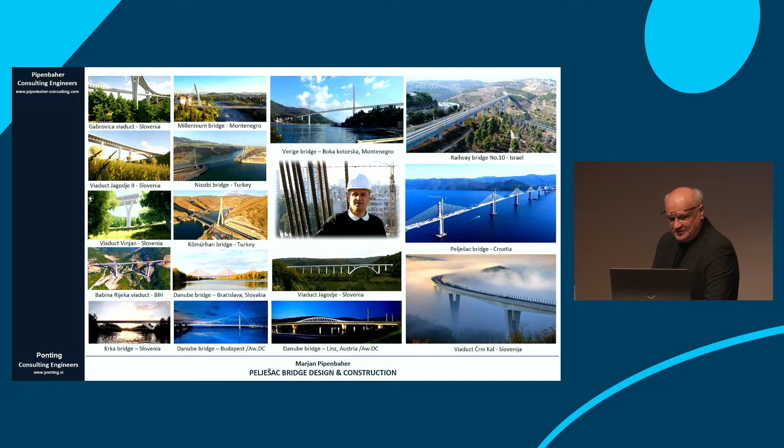Okay, we will complete this session with the engineering issues. For designing such a bridge, you must have not some, but quite a lot of experience in stay cable bridge design, long span bridge design, earthquake engineering, fluid dynamic analysis, and such a bridge.

We should be aware of what our knowledge is, and that we have to construct more and more bridges, not walls. It is also important that we understand that we construct as simple as possible, as all in life, but not as simple as some politicians or other people think. This is also a very powerful statement from Einstein, a genius: It's not that I'm so smart, it's just that I stay with the problem longer. It's very good.

About less is more, più di meno, mit wenig mehr, it is also very important. Exupéry wrote very nice statements about this issue: what is perfection? He was a constructor of airplanes, and also a writer. And you can see the development of the airplanes from the First War to the Second War, the Spitfire and the stealth structure. Perfection is when you cannot remove anything more.

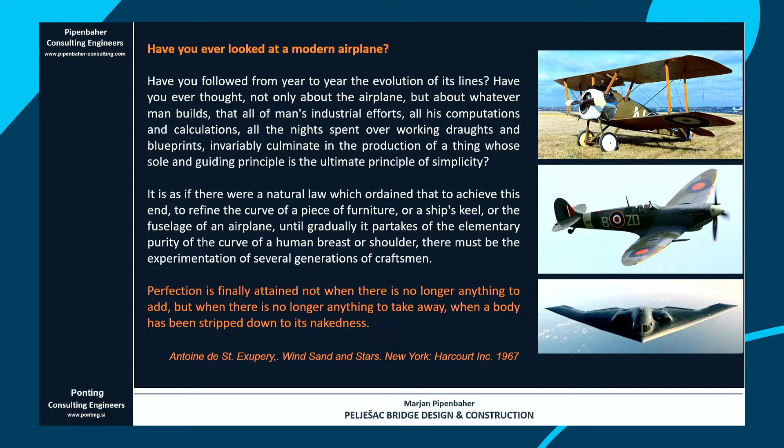Engineering is an old issue, and it was always connected. It was always the master builder. From Roman times, Vitruvius wrote his book, De Architectura. He discussed functionality, aesthetics, and firmness, which means the stability of the structures. Then Palladio added that the bridge should be ornamented, well-aligned, comfortable, durable, and also that we should take care of the architectural design of the bridge.

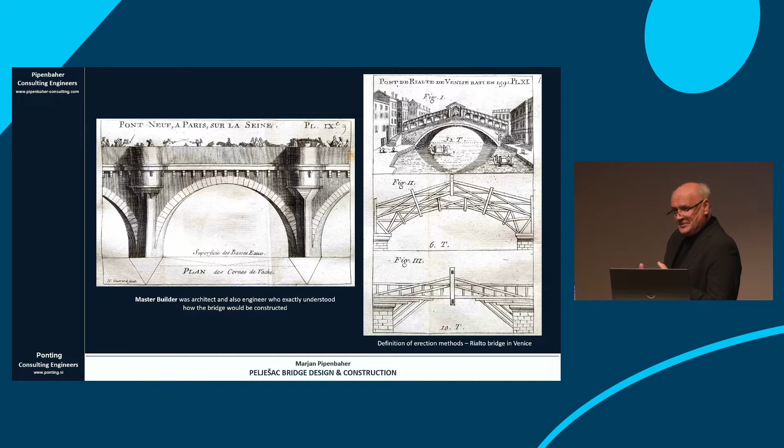Till the end of the 18th century, there was the master builder. The builder was the architect, the engineer, the constructor, and what was very important, the master builder should know exactly how the bridge or the structure will be constructed. Anyway, bridges contribute a lot to our society, bringing growth, integrating people.

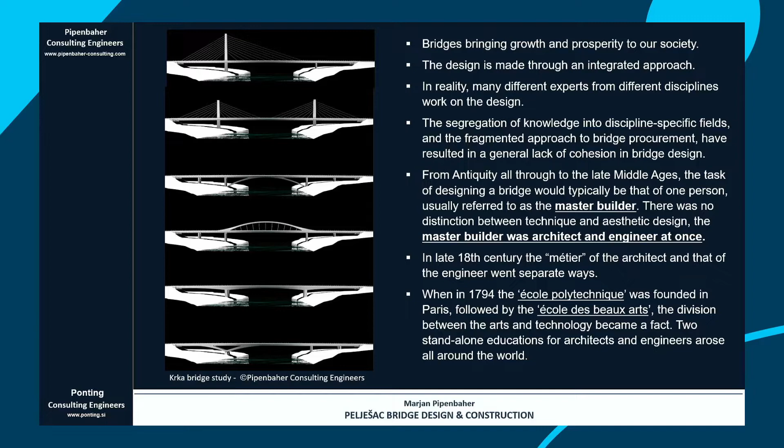But there is one problem, the segregation done at the end of the century, where the building process was separated by the École Polytechnique and the École des Beaux-Arts into architecture and engineering, and that leads to specialization. I just want to show you on three or four of my projects how I understand the architectural design of the bridge. For me, it's very important. I like to study a lot. I like forms. I like nice design.

So for large bridges, that means large viaducts, we should take care that the structure is already the architecture, so that the architecture is developed through the structural design. It is normal that you can realize, that you can understand, the flow of the forces. This is the Črni Kal viaduct in Slovenia. We won the competition, then constructed it. We have just one 95-meter tall pier, and it looks very nice in this landscape.

Then I got a mission: under the Črni Kal, there will be two high-speed railway viaducts. We already had huge problems designing the Črni Kal, and after that we have to add two additional viaducts.

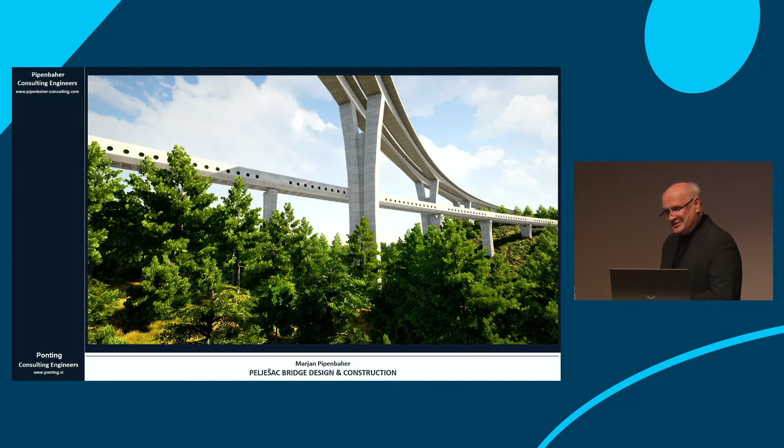And that was quite challenging, and my idea was that these railway viaducts should be designed like a high-speed train which is passing the valley, and it will look like this.

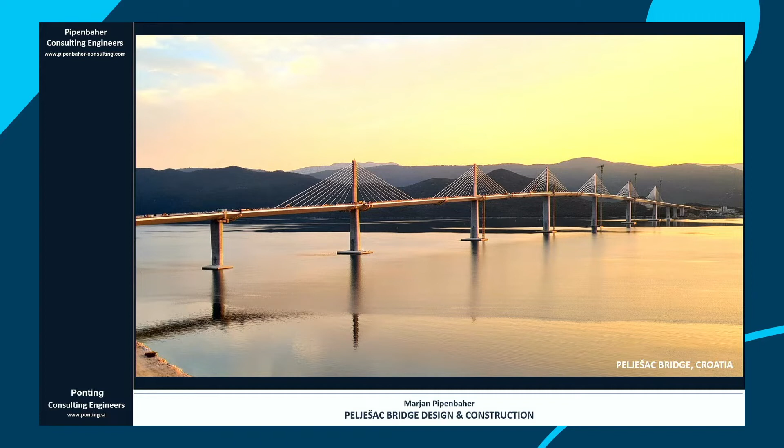Then is Pelješac Bridge, which is, from a structural point of view and construction point of view, a really demanding construction: foundation, earthquake, wind, all these issues. And it is also very important how to fit it to the landscape. The structure of Pelješac should not dominate this very, very nice landscape, and we can just add a structure which linearly passes this beautiful bay.

Okay, that was the Millennium Bridge in Montenegro. When Montenegro declared independence, they wanted to have the bridge as a statue of modern Montenegro. Okay, we did it. It is a bridge, it is a statue, and they like it.

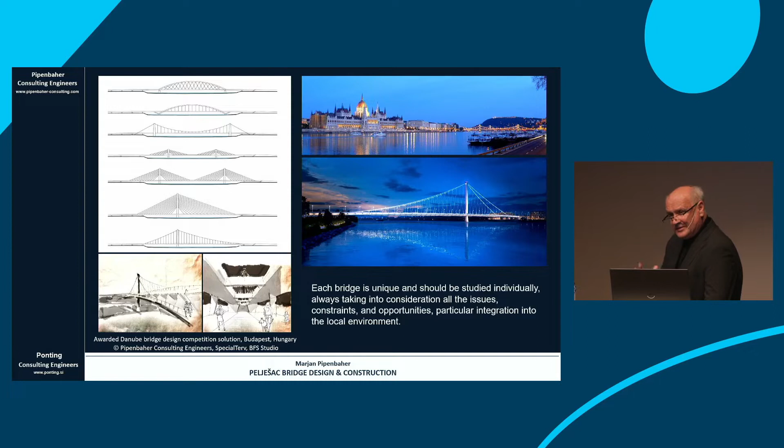This is Budapest Bridge. We were invited to the international design competition. 18 of the best or well-known offices from all around the world were invited, and we also got the purchase award in this competition. Another competition which was also awarded was the competition for the Danube Bridge in Linz. We were awarded the second prize.

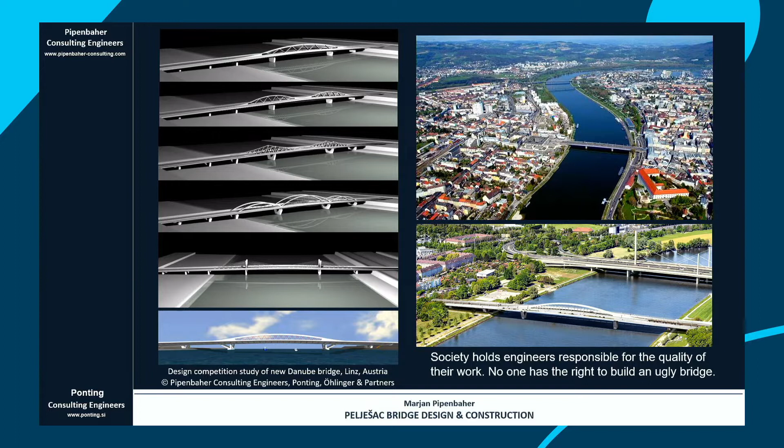This bridge, as I told, for me was like a Ferrari. Marc Mimram won this competition with more of a Chinese design bridge. A bridge designer must consider visual quality as a fundamental criterion, like stability and also safety. This is the bridge concept. This is the bidding design.

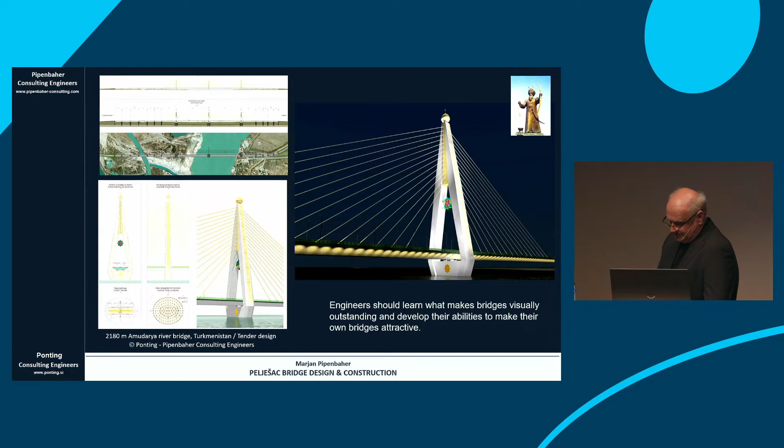I prepared one conceptual design or bidding design for the Amudarya Bridge in Turkmenistan. The presentation was done, we presented it to the president, but after that, this French-Croatian joint venture was not strong enough to push out the Ukrainian contractor.

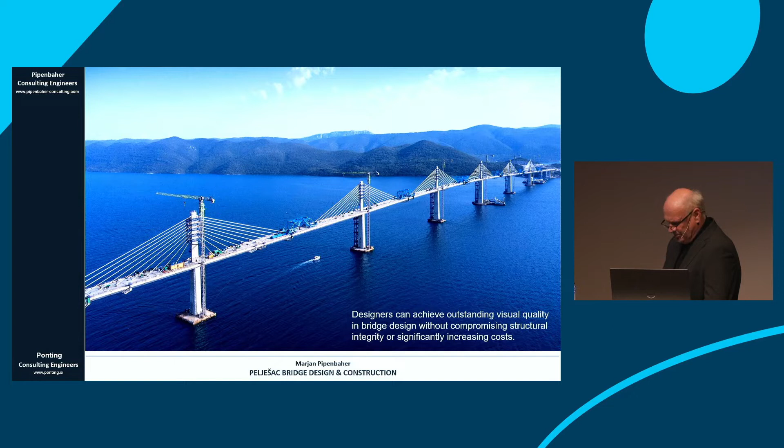And of course, the Pelješac bridge, I like it very much. I like this landscape. I like Croatia. And I have to point out, designers can achieve really outstanding visual quality in bridge design without compromising structural integrity or construction cost. That's very, very important. You don't need to add so much. The design for bridges doesn't cost so much, just a little bit, and it is worth making these efforts.

For bridges and for other structures, I always discuss that for me the bridge builder is an engineer and architect. I cooperate with a lot of architects, we also find a way, but a lot of bridges were designed only by me, like Amudarya, like Koroshki Most, like all the bridges in Turkey, cable-stayed bridges over the Euphrates River, also the Pelješac bridge. And what can we learn from history? It is important that the bridge builder, that means the designer, should have enough experience. Also, for bridges, it's very important to have technological knowledge, because the designer is the first who should know how the bridge will be constructed.

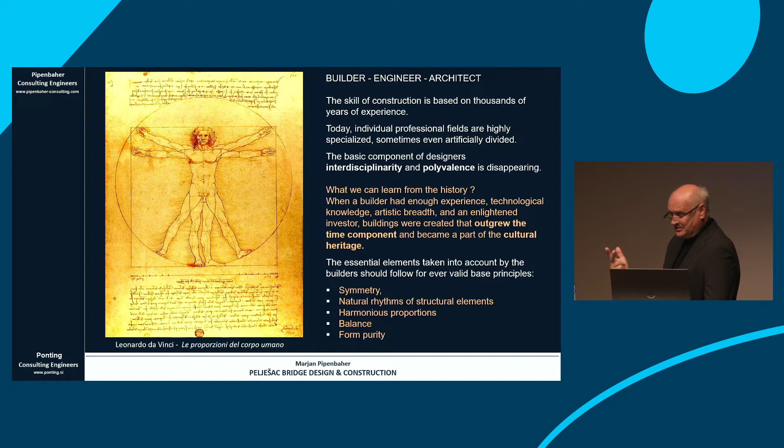It is also important that he has architectural feeling, and on the other side, you should have the client who will support the idea, who also has to pay the investment, and then we can get buildings which can outgrow the time component and become part of the cultural heritage. But always the main issue is symmetry, natural rhythm, harmonious proportion, like always in music, balance and form purity. And just like true love, architectural and structural design bridges can last a long time, surviving all styles and all fashions.

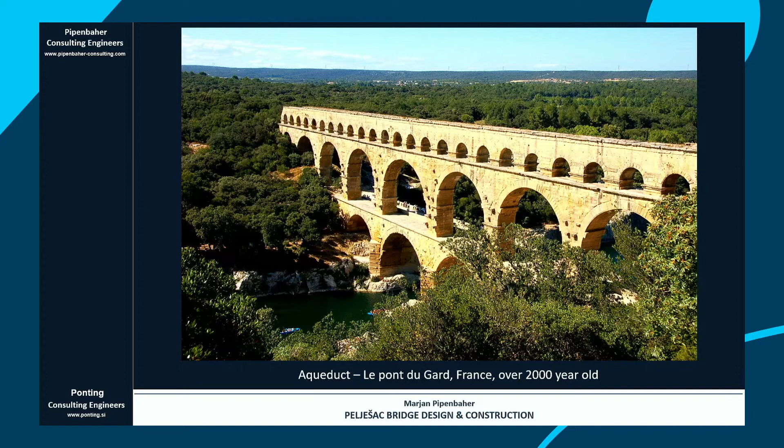And one of such bridges is the Aqueduct Le Pont du Gard, over 2,000 years old. And I have to show you a very interesting concept of a bridge, which was prepared by Faustus Verantius 400 years ago. In the meantime, technology, design, computers, all this contributed a lot to the development of bridges. In the meantime, man also landed on the moon. We have a space station. And in the meantime, such bridges were also constructed.

It's amazing, Turkey now has 2 world records, not the Chinese anymore. 3 years ago, the Chinese had all the world records for long span bridges. And for stay cable bridges, of the top 10, 7 were constructed in China, 1 in Korea, 1 in Europe, and 1 in Japan. And this is the Sultan Selim Bridge, which follows this idea, the 400 years old idea of the hybrid bridge concept.

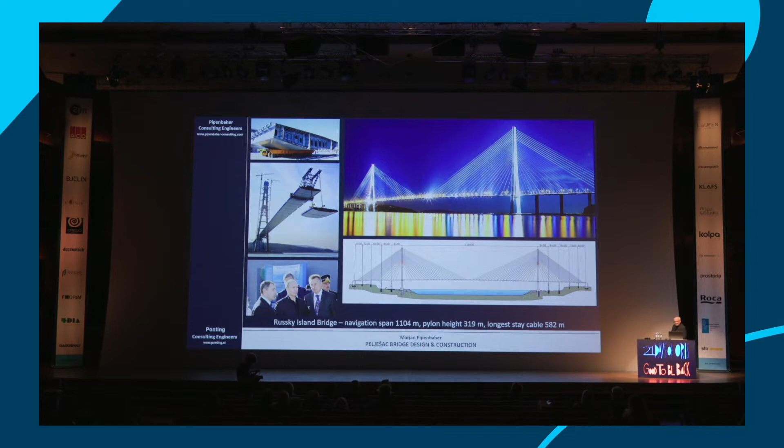And we should not forget, all around the world where I was working, bridges are always a subject of politics, very interesting for all politicians.

I also want to point out one issue, my experience from the last competition for the Danube Bridge in Budapest. Budapest is very nice. I liked it so much. It has a lot of bridges. But it is interesting, all the old bridges are very nice, but the bridges constructed recently, I don't like them, they have too much of an engineering approach, without any feeling for the architecture.

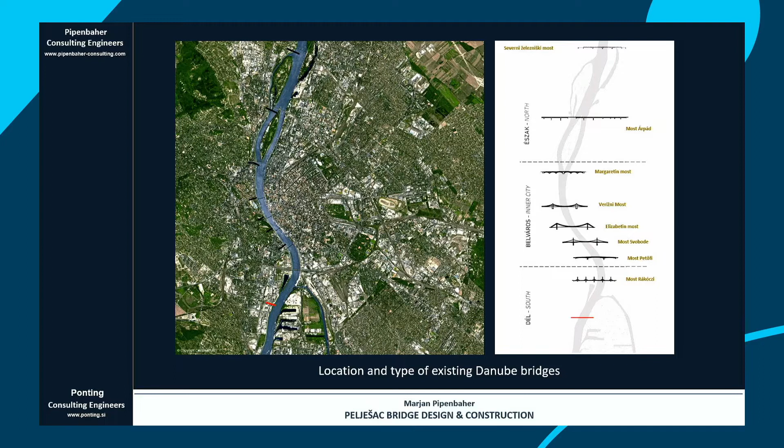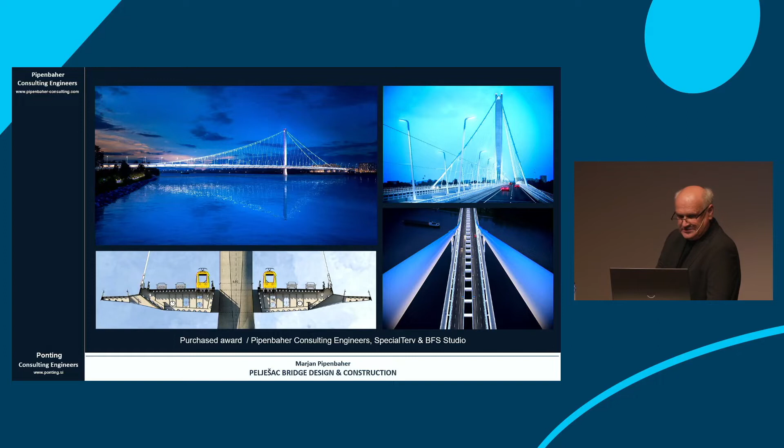Urbanism in architecture, as you heard in all these lessons, urbanism is the main issue in architecture. So you have to really understand the genius loci, the location, to find the proper approach. This is also very important for bridges, that you understand the location of the bridge, topography, geology, and all these issues. The problem is also that quite famous offices, architecture and structural engineering offices, gave such a proposal. That means it's only important that it is not déjà vu, and it is the negation of all structural logic.

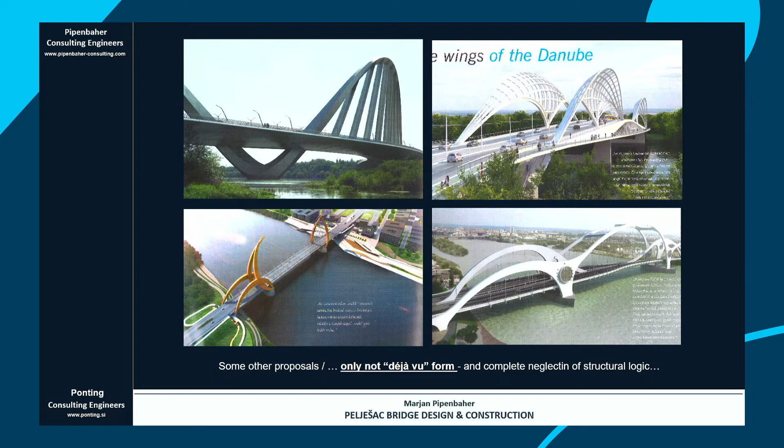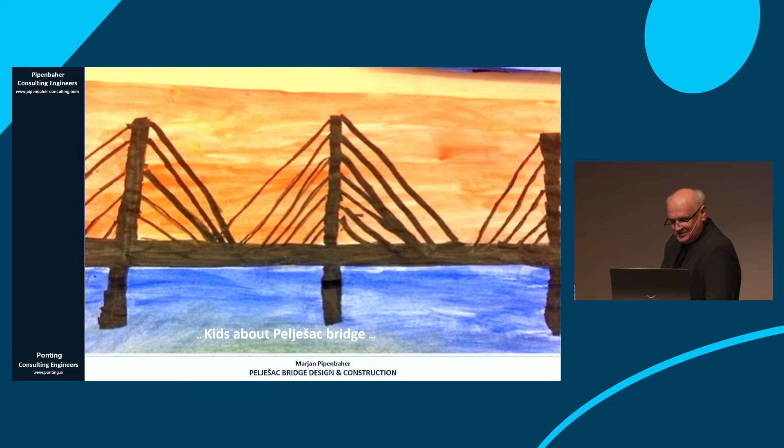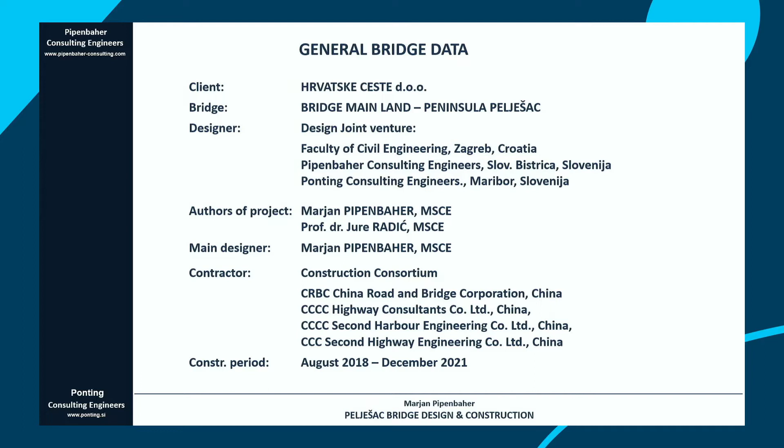I just want to point out that CRBC did really a perfect job. They made a lot of effort. It's not easy to come to Europe and start to construct. I was several times in such a situation, in Turkey the first time, in Israel, in Algeria, in Germany, in Austria, in Croatia also, in Montenegro, in Serbia. It's not easy, you have to come, you have to prove that you're able to do it and so on.

Okay, these are the main characteristics of the bridge. It is really a huge structure, and this is the responsibility. These are really large structures constructed in the area. That's 70,000 cubic meters of concrete, 70,000 tons of steel structure and so on. And it will stay there. We will not be alive anymore, but they will be there. If the maintenance is okay, it will stay there without any problems for 200 years, unless there are problems with the functionality of the bridge, if the technology of traveling totally changes.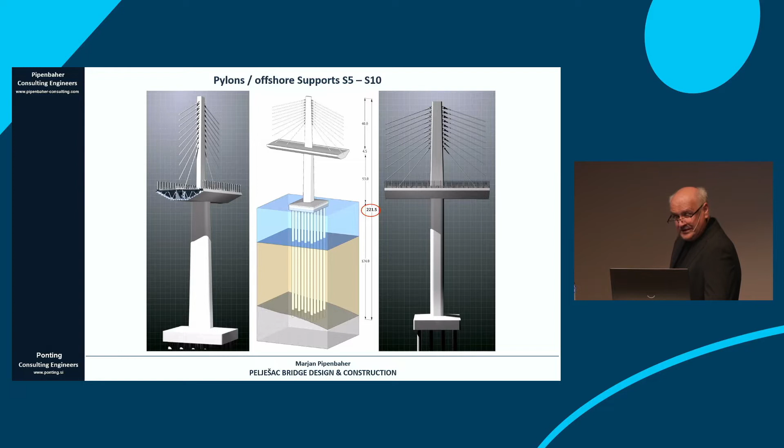These are the piers. What was very problematic, and where we spent a lot of time, is how to found the bridge. We analyzed having skew piles versus just vertical piles. We decided to have just vertical piles, to simplify construction and reduce the risk.

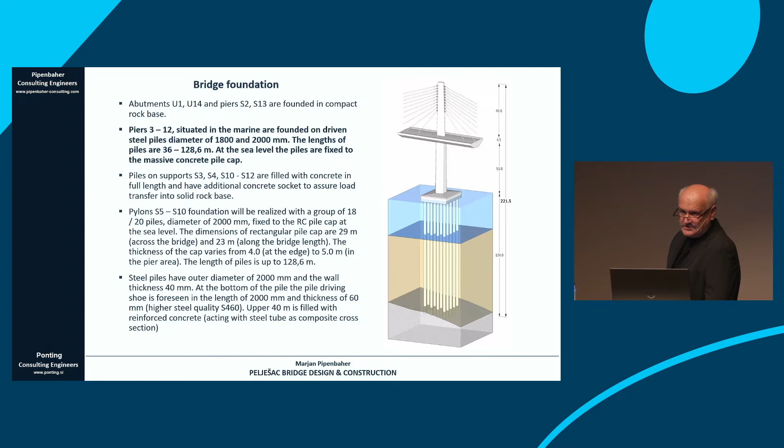It is very important during the design to do the risk study, not just how much the bridge costs, but also the risk study. What are the risks? Something can be cheap, but the risks are very high. It's very important that in parallel with the design, we think about what are the risks during construction, and what are the consequences on delaying construction and the cost if something happens.

Just a short overview about the static and dynamic analysis. For such bridges, we always do two parallel analyses with two teams inside the office. We don't want to have any serious complaints after that, and discussion with the check engineers.

The check engineer for final design was COWI, this famous company constructing and consulting all around the world, with over 6,000 engineers. For detail design, it was Ramboll, even larger than COWI. We didn't have any complaints, so we didn't change a lot, almost nothing. That's very important, because you can lose a lot of time.

I'm now check engineer also for one very large stayed cable bridge in Turkey. They intend to construct the channel between the Black Sea and the Sea of Marmara, and there is a bridge. We were not competitive, we lost this job, but the client, the General Highway Director, wanted me as check engineer for this bridge. I know what it means if the project is not done properly, how much time you lose.

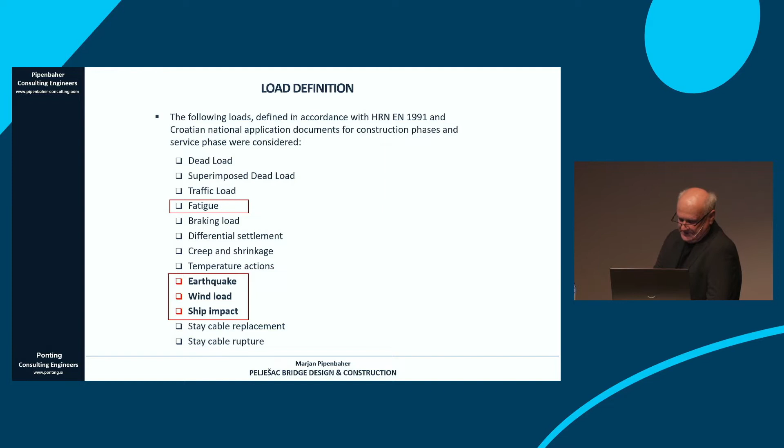The loads which are decisive for the Pelješac bridge are, of course, earthquake, wind load, ship impact, and since we have a steel plate superstructure, this means fatigue is also very important. We did first a preliminary analysis, and after that a detailed analysis.

What was also important is that such a bridge with such foundations, in soft clays, you cannot do linear analysis. So the bridge was designed and analyzed with total non-linearity, considering soil-structure interaction, meaning the interaction of the soil and the bridge together. That forms the curve for analyzing the bearing capacity.

One important issue is the wind load, especially during construction. Bridges are very sensitive during construction because they are not yet connected. After they are constructed, they are quite stable. The stability can be affected due to foundation issues and so on, but generally it's okay.

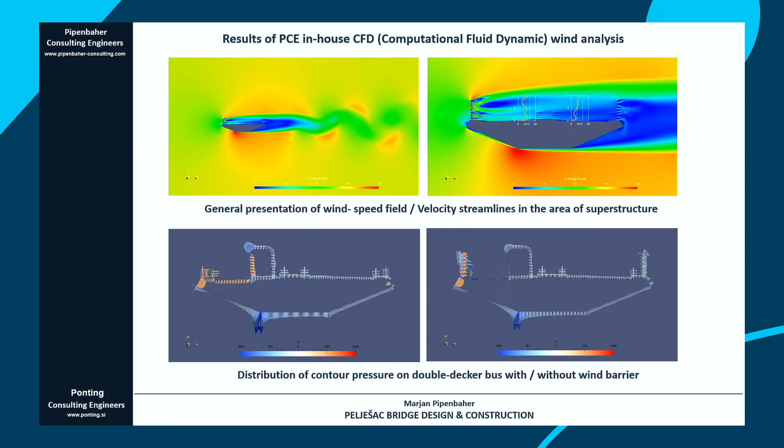It was also important that we check the stability with traffic, to ensure the stability of vehicles. For personal cars, there will be no restriction. For trucks, perhaps some restriction for the very light, high double-decker buses, but up to 130, 140 kilometers per hour, there will be no problem with stability.

As is usual with such bridges with such a span, we did the wind tunnel test, done in Copenhagen, Denmark, by Force Technology. First is the section model test, and if that's all okay, then follows the full bridge model test.

I can show you now. This is the section, this is the pylon test, the bridge during construction. In reality this is about 66 meters per second, that's about 240 kilometers per hour.

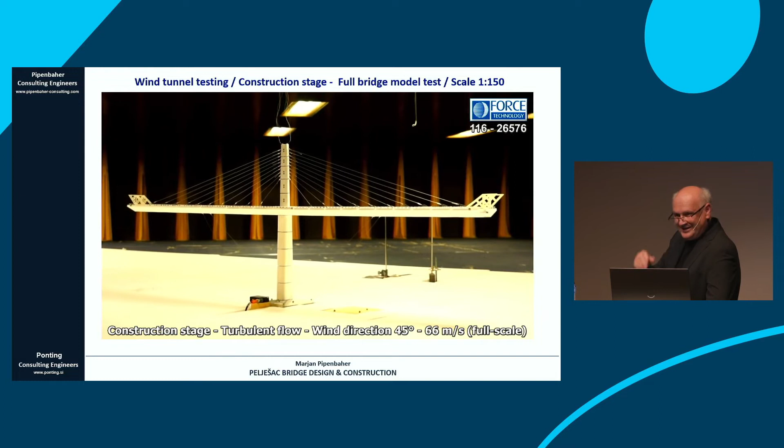So these steel bridges are not as stiff as concrete bridges or stone bridges. They always vibrate, they always vibrate. It's just the issue that the vibration should be within the prescribed limits.

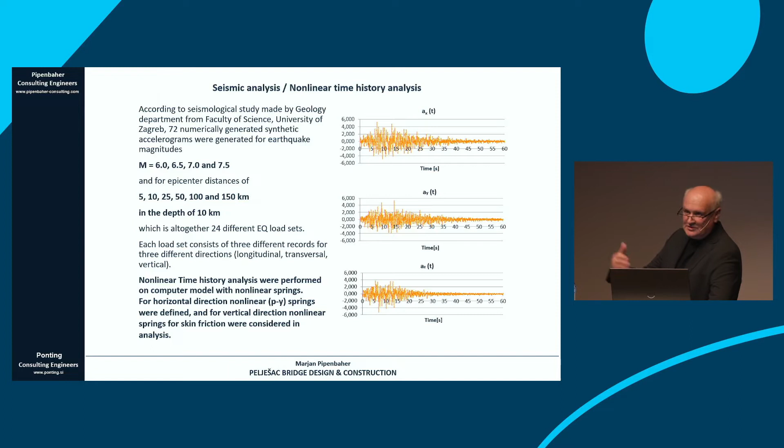What it would be, really the huge problem is the seismicity. We did nonlinear seismic time history analysis. We got from the university in Zagreb, from the Institute for Geology department, the accelerograms for earthquakes with magnitude from 6 to 7.5, with epicenter 5 to 150 kilometers apart, and at a depth of 10 kilometers.

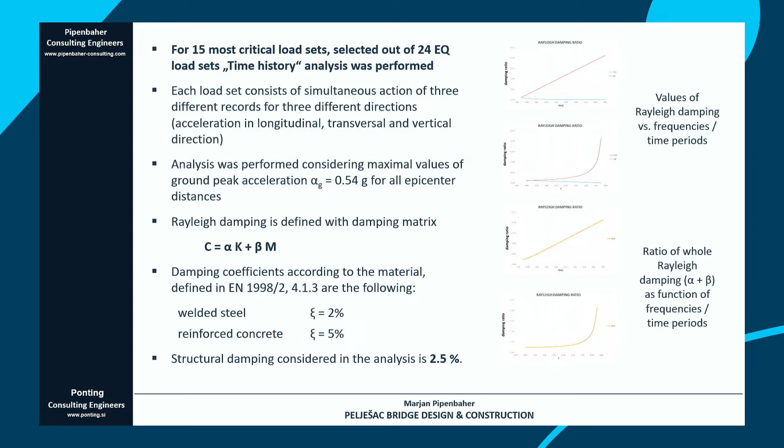Always it's a problem, what is the real damping? This is not so easy. So at the end you have to sacrifice some frequencies, but okay, it can be done. Theoretically it's not clear, but when you come to the practical problem, it becomes a problem. But it can be done, and it was done.

That's okay. Of course, the bridge is designed so that we don't allow any damages. This is very important, all this issue about the reduction factors and so on. They can be applied in buildings, but also in buildings, I have several times designed tall buildings, if you consider and estimate the damage criteria.

What happened? I designed in Ljubljana one with Professor Podreka, one residential - it's a business house, 70 to 80 meters high, and the structure cost was 50 million euros, but the facade was 10 million euros. So we have to be very careful.

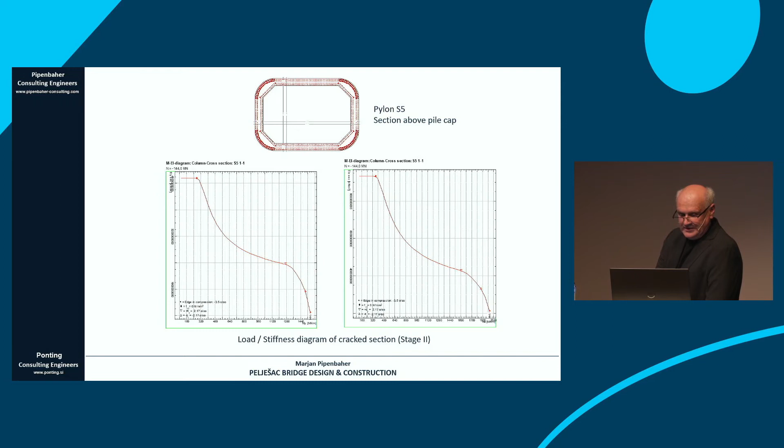We also paid attention to the contact between the concrete structure and the steel structure, because we designed it quite inventively. It is a hybrid structure, so we don't have any bearings under the pylons, and this is quite a delicate contact between the steel structure and the concrete structure. That was all designed and so on.

This is about design. Another issue is service life, monitoring and maintenance of the bridge. This is also a very, very important issue, and the client and designer, all of us should take care about this. The bridges which are 2,000 years old, these bridges we are now constructing cannot last so long. They are also not designed in a way like arch bridges with very, very thin sections, mainly in stone.

So it's very, very important that the client understands that something is construction cost, something is service life of the bridge, what should be done during the service of the bridge, how to maintain it, how to repair it. And also we have to reconsider what will be the reconstruction and replacement cost.

I'm now designing 2 highway bridges in Slovenia. This will be the first time that 2 bridges, 2 viaducts, one 450 meters long and one in Ljubljana 300 meters long - they are so damaged that it is crazy to invest an additional, I don't know, 1,500 euros per square meter. So we have it, and the client made a decision that the bridge will be replaced with new structures, and this is really problematic.

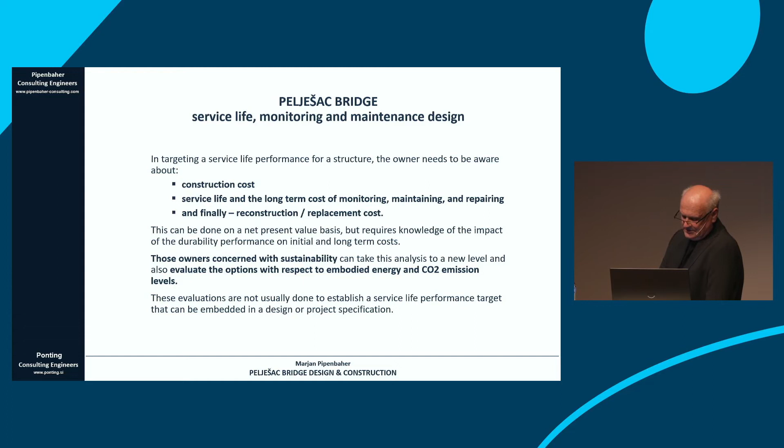What were the special measures for increasing the durability of the Pelješac bridge? The first was we don't have any sharp edges - that's the first. Then we used ultra high strength concrete, C50, 60, pylon 70, 85. We also need this strength because of the forces, because of the loading.

We increased the protection thickness, thickness of the protection layers. Then we additionally reinforced this protection layer with stainless steel bars. Also, we used protective coatings.

It is very important how to cast the mass concrete. The pile cap has dimensions of 29 by 23, and the thickness is 5 meters. The designer and also the contractor should take care how such mass concrete will be constructed, and what are the consequences so that it does not crack. These are very important issues.

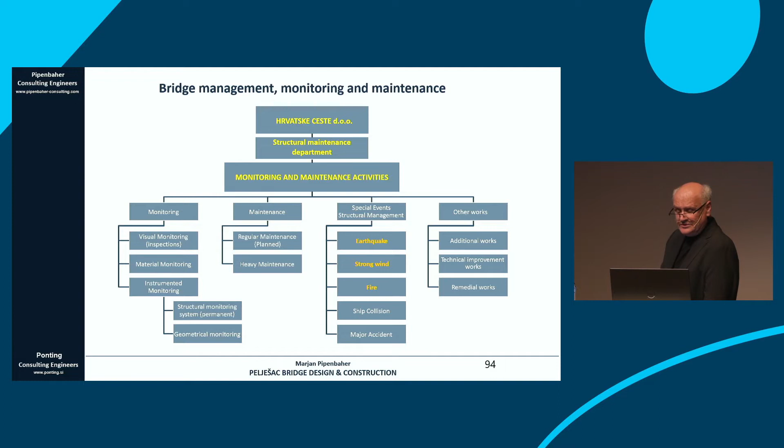These are all issues about the bridge management. We prepared in the final design stage all these reports about the bridge managing, monitoring and maintenance, and now during the detail design there will also be prepared a detailed report about how the bridge should be inspected and how it should be maintained during the service.

There are a lot of recommendations, and what is also important, we also install on the bridge a complete monitoring system, so that we are able to analyze the short and long-term structure behavior, that we can early register the potential damages, that the client can effectively plan the maintenance work, assessment, and of course we are increasing safety. This is the concept.

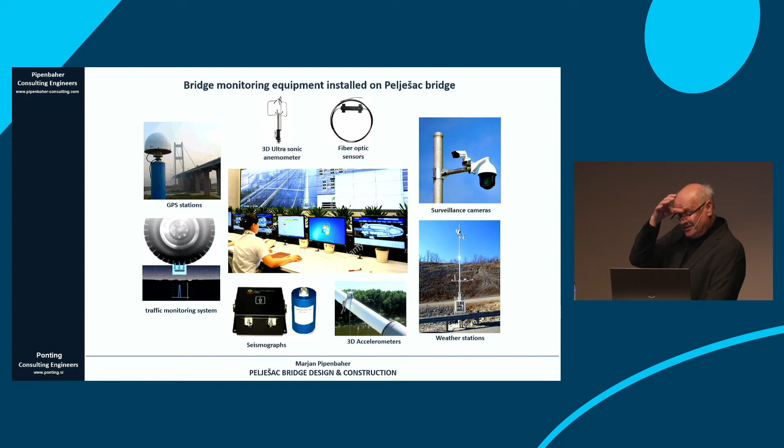Now it's already completed and installed, the complete bridge monitoring system. That means over 200 fiber optic sensors are installed on the corner piles, practically on all supports, then on the piers, on the pylons. Then we have accelerometers on the pile caps and the structure, top of pylons. Top of the pylons are also GPS stations, so that we have through the satellite direct information in time what is the deformation of the pylon.

There are 2 anemometers, one for measuring Bora wind, one for measuring south wind, and also 2 seismographs on each side, because it is very important that during an earthquake with a magnitude over 7, we should know what was the real acceleration, what is the spectrum of this, so that we can really reanalyze the bridge and see, but it should not be damaged in such a case.

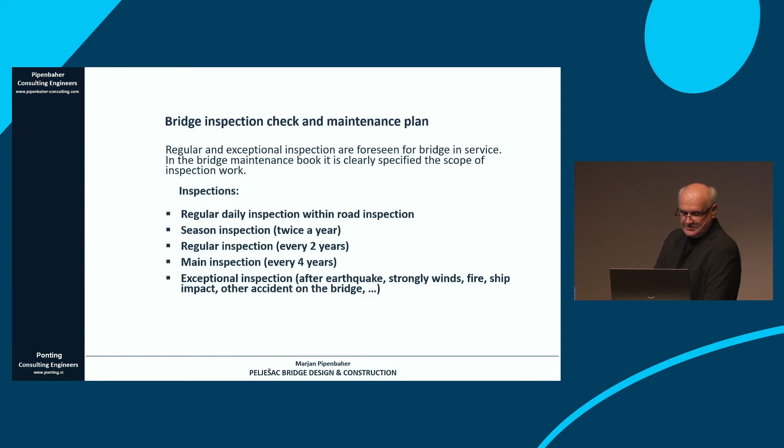Important issue is also the bridge maintenance and checks. That means daily inspection, seasonal inspection, every 4 years, and after exceptional events like earthquake, strong wind, fire, ship impacts, and so on. And we also prepare the table for the client to warn him what he will have to do during the service, and what will be the activity.

For example, when to replace the anti-corrosion protection of the steel structure, when to replace the pavement, when to replace the asphalt, and so on. Just to show a little bit, if the bridge will be well maintained and somebody really will take care of it, the bridge even after 100 years should be like untouchable. But another issue is if you don't take care or you have poor maintenance work.

And now, what will also be very interesting for you, how the bridge was constructed: the site organization, production of piles, pile cap construction, pier construction, pylon construction, superstructure, execution of specific works. Usually, not only for bridges but also for buildings, when you complete the design and send the drawings and digital version, for the designer this is not the end of work. The real work starts during the construction, because you have to take care of the method statement with the construction company.

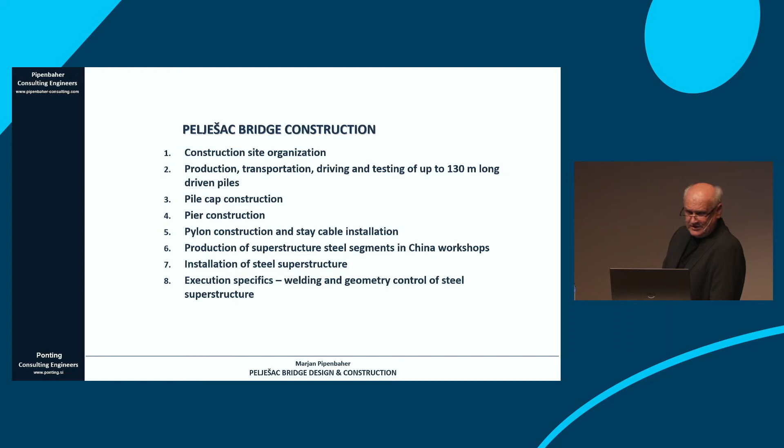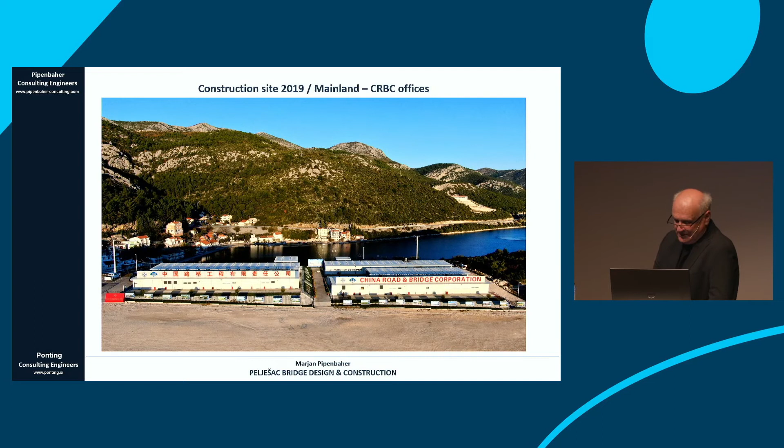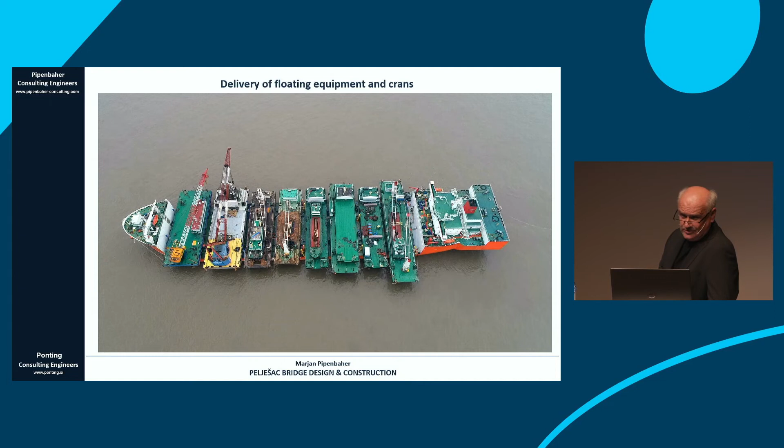The Chinese took care that all this was done. Of course, the main issue is technology, how the bridge will be constructed and what technology is available to the company. They delivered, in one go, eight floating barges, also a floating crane with a capacity of 1,000 tons, which is quite rare in the world. Such floating cranes have Korean, Japanese, and also Chinese contractors. In Europe, it's mainly up to 500 tons.

And this is how it was started, and here is the driving machine for the driving of the piles, and production. We have to see how the pile caps were done. In the final design, we were thinking, okay, if this will be constructed by European companies, we have to do it so that they can be competitive.

So we took into consideration that the piles would be done in two pieces. But the Chinese said, okay, we are able to do piles up to 130 meters in one piece, and that was done. And here they gained at least 2 months, because the welding of the 164 piles

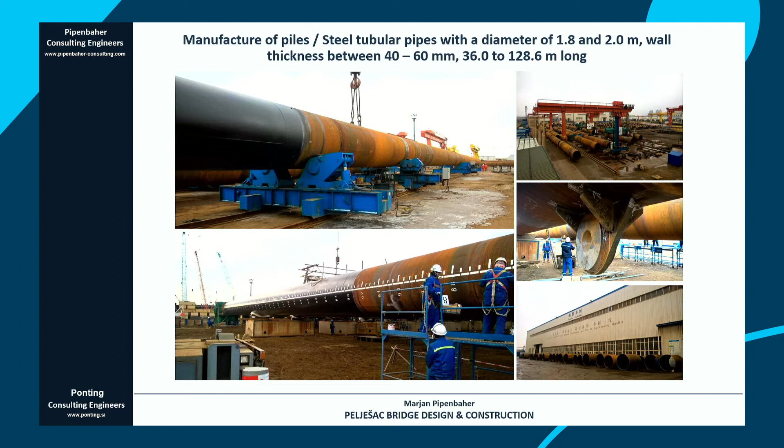with a diameter of 2 meters and a thickness of 40 millimeters would be at least 3 days per pile, without complaining about the cracks, about the bubbles, and about the weld quality. Construction of a pile foundation.

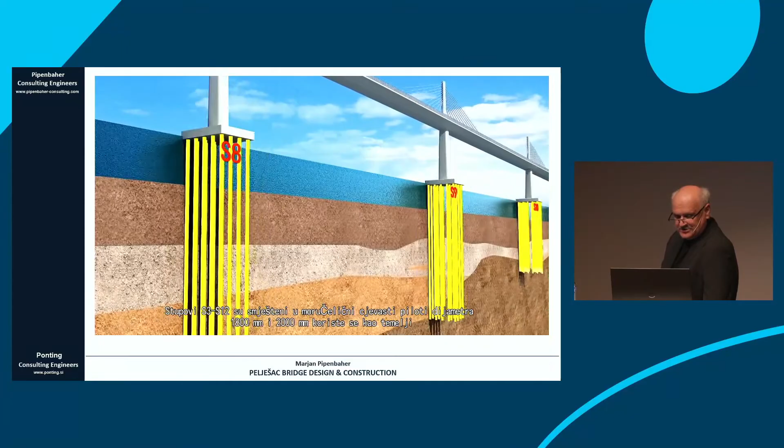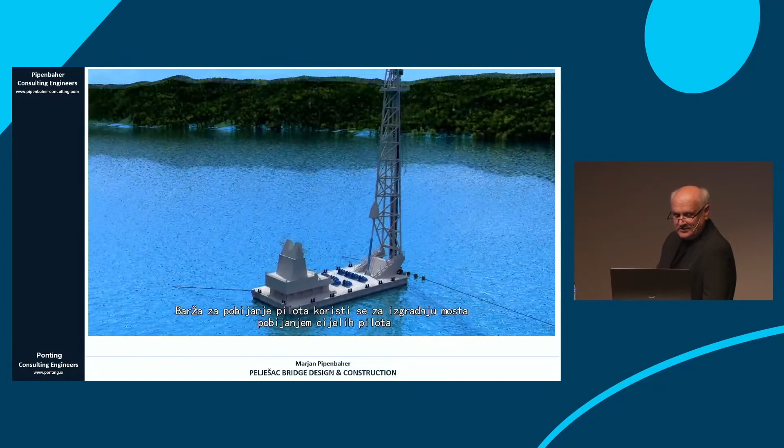The S3 to S12 piers are located, as we did in the presentation. Steel pipe piles with diameters of 1,800 millimeters and 2,000 millimeters are used as a foundation. The piles on the approach area, S3, S4, are 1.8 meters in diameter, but for the pylons they are 2 meters, and the thickness is 40 to 60 millimeters. And here is clearly shown how the piles were delivered and how they were installed.

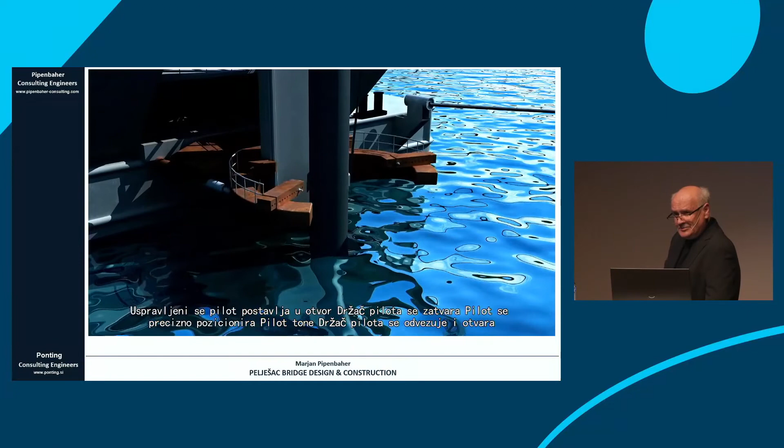Through driving whole piles. First, the steel piles for central piers S7 and S8 are driven. The pile driving process is unbelievable, how this Chinese captain manipulated it, because this floating barge doesn't have any machines, so it's just moving through the winches, and with 2 or 3 iterations he exactly fixed the barge, and it was quite effective, and it's really amazing.

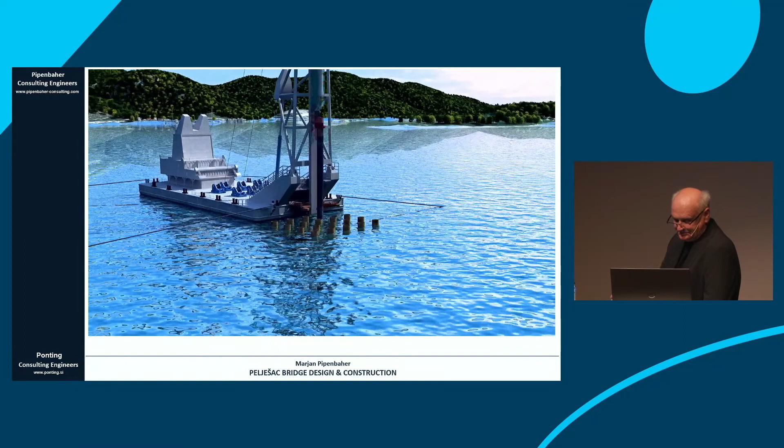And here again, that's reality, delivery of the piles and pile driving. We also used the bubble curtain to protect the fish. Okay, it can be effective. But that was also a request for the protection of the fish and so on.

I don't have so much time. We will go on.

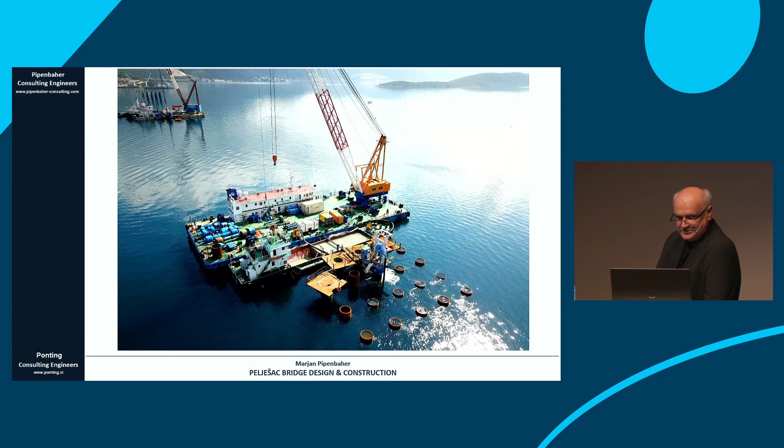These are a few pictures from the pile construction. This is also the RCD. It is RCD because when the piles are driven, we have to clean up the upper 40 meters, and the upper 40 meters of the pylon piles are filled with concrete. That means installed reinforcement filled with concrete, and this upper 40 meters is acting as a composite cross section because there is such high loading.

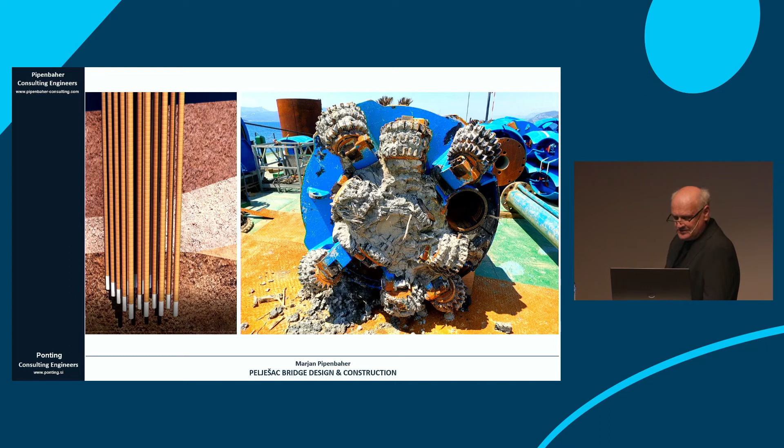And on the approach bridge, pier number 2, 3, and the pylon 10, 11, 12, there is a very thick layer of soft clay. So we have to do the buried piles. That means we have to drive the piles, and after that we have to clean up 80 meters of pile and do additional drilling of 8 to 10 meters in the solid rock, so that we assure the required bending and axial bearing capacity.

One very important issue is what the real bearing capacity of the piles is, and when we drive piles through the soft clays, there is the well-known phenomenon of the setup effect, because the clays are saturated with water, and there is pore pressure, and this change in the pore pressure has quite an amazing effect.

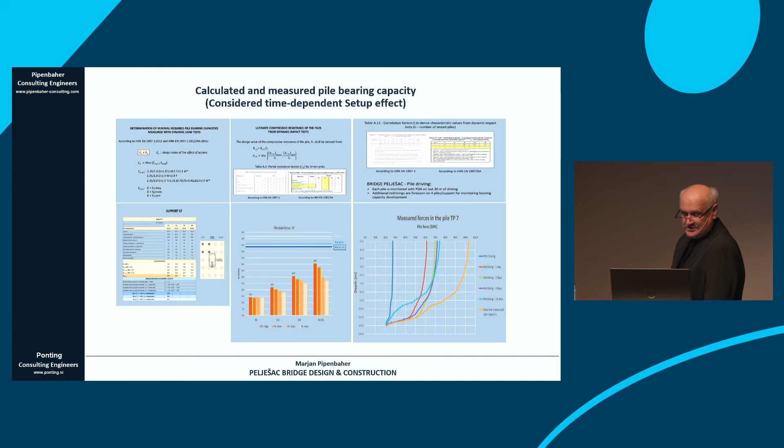During the installation of the piles, it falls really very low, so if the initial bearing capacity of the pile was, I don't know, 10 meganewtons, after 1 day or after 3 days it was already 40 meganewtons, and after 90 days it was between 70 and 100 meganewtons, and the largest force which we have is about 40 meganewtons per pile. So we have the required bearing capacity of the pile.

We also tested the piles for lateral resistance, because our analyses are nonlinear, and we also checked what the real behavior and the real nonlinearity is, and we found out that we are quite close. The difference is about 10%. It's very good for such a terrain and for such circumstances.

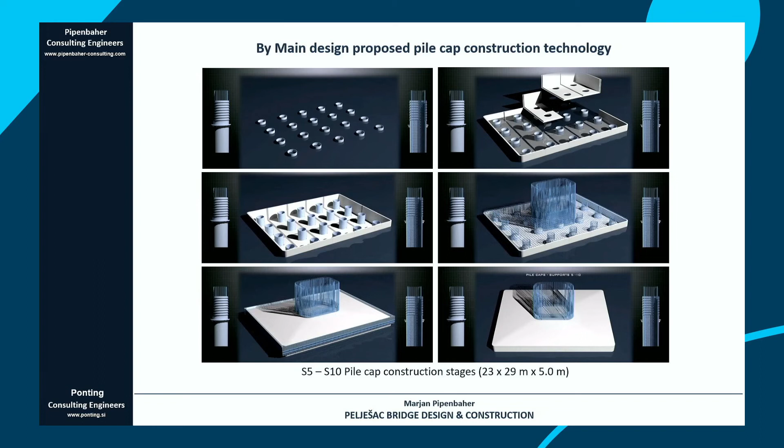Pile cap construction is not easy to construct offshore. No? It is not easy. You have to do it all from the sea, and we proposed to do the shell concrete formwork, and we also have in the tender design that the contractor can also propose to use the steel formwork, as the Chinese did. And here is pile cap construction.

Just to show how the pile caps were constructed. This is not a simple procedure. And construction of such a bridge takes three years. It took 3 years.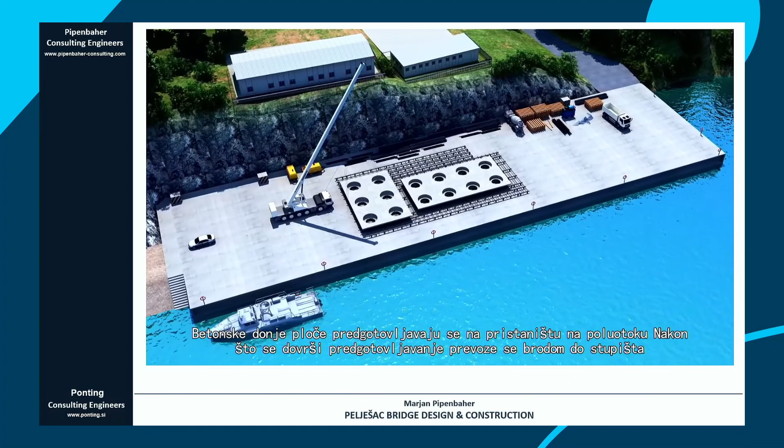And all these years, we were daily in contact with the site, with the site engineers, with the contractor, and this is very important, we are at least once per month for a few days on the site, or even more, two times, that we have the meetings, that we solve all issues. We have to approve also all the method statements.

That's very important. That was in the tender design, that the main designer should approve all the construction erection methods. So that's the best way to protect the client and to take care of the high quality of the construction.

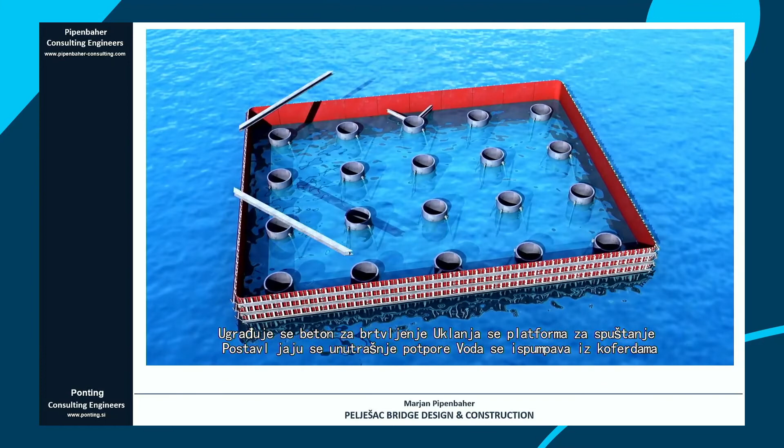Sealing concrete is poured. The lowering platform is removed. Inner supports are installed. This is real technology, and for instance, if the Chinese install 34,000 tons of steel structure in the superstructure, they use additionally 9,000 tons of steel structure to construct the pile caps and the superstructure. It's quite a lot, plus 1.5 meters, plus 2 meters. The largest casting amount is 1,000.

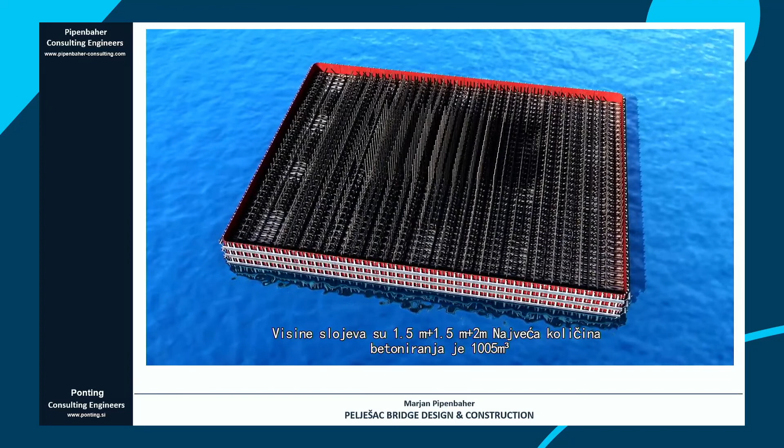And all this time we have good cooperation, and they followed the instruction of the main designer, and that is also very good. And we also try maximally, of course, to help them so that the bridge will be constructed on a high quality level. These are pictures during the construction. A lot of work, really a lot of work, demanding.

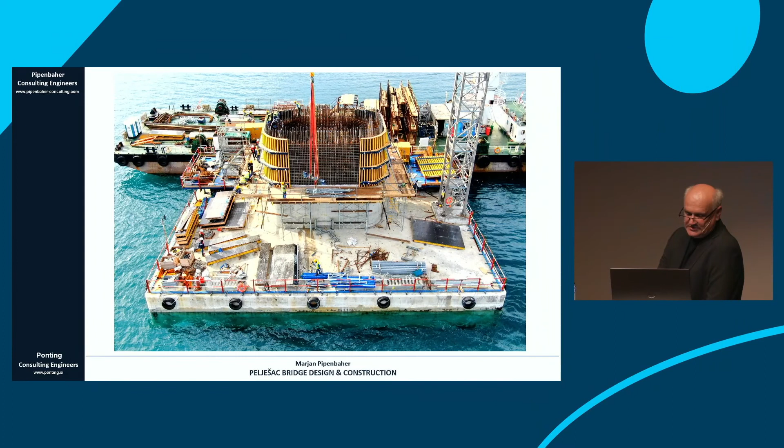You use the hydraulics for lowering the complete scaffolding, with the concrete plate, with the side steel plates, and this is also the cathodic protection. The construction of the piers is nothing special, self-climbing formwork. I just have to point out, it is highly reinforced. These piers, 3 to 3.5%, that's a lot.

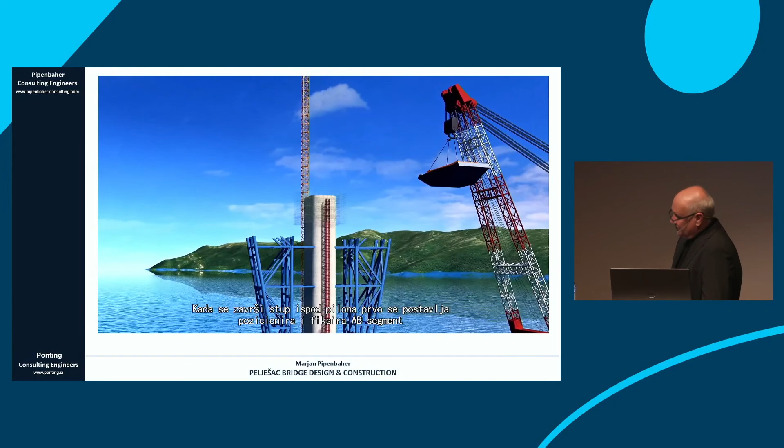So we have strictly the couplers of the pylon. The support bracket is installed while the below pylon pier is constructed. When the below pylon pier is finished, first the reinforced concrete segment is positioned and secured. Then the first two steel segments were installed by floating crane. Then the connecting segment was cast.

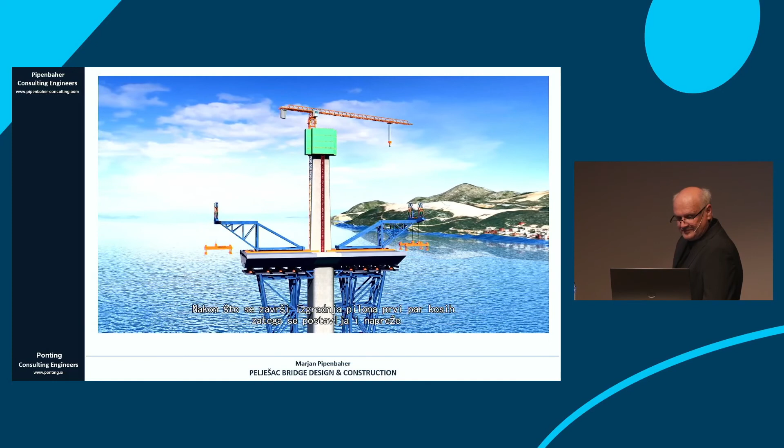And it is also important to know that we stress this part of the concrete structure so that we don't have decompression, even by earthquake load, so that we don't have any damages or cracks during a large earthquake. The deck crane is also set up after the pylon construction is completed. That's how it was done, also with the pictures.

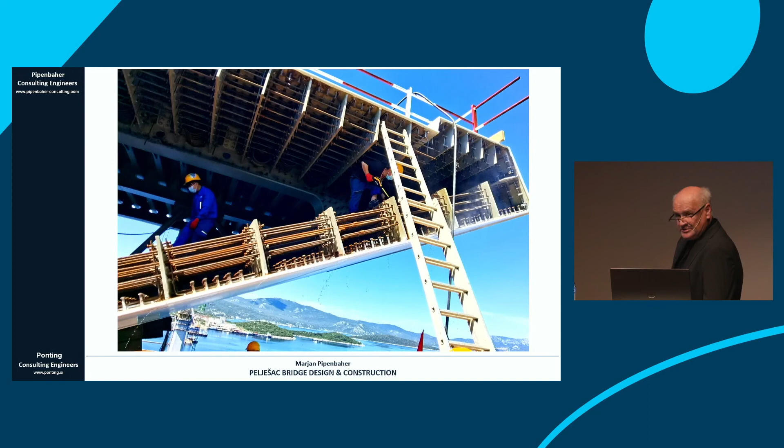Also, this reinforcing steel was installed in China. It was installed in China because it was impossible to install it after that. This is pre-stressing of the structure, pylon construction. The pylon is also a solid concrete section, 2.5 times 5.

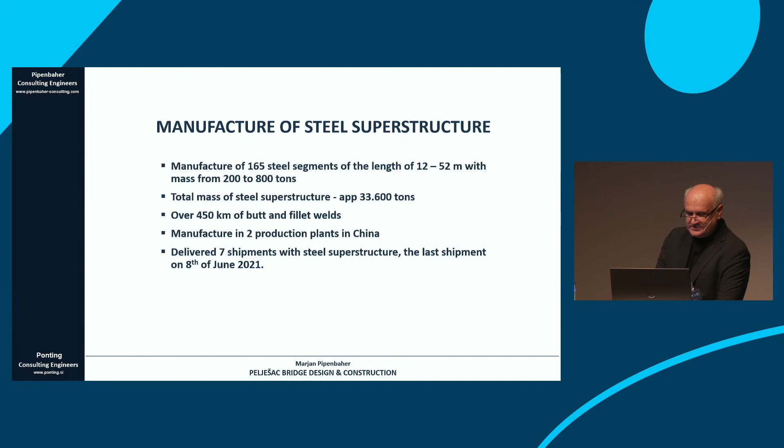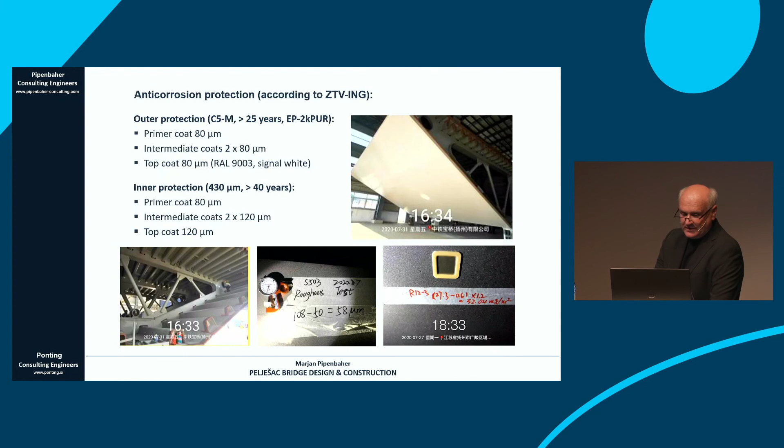Okay. Then just to show you the manufacturing of the steel structure. A lot of work was done. 800-ton steel segments, all this testing, corrosion protection, shipping, 7 shipments were done, installation of the structure, the procedure, when you're installing this, installation of segments, how to do it.

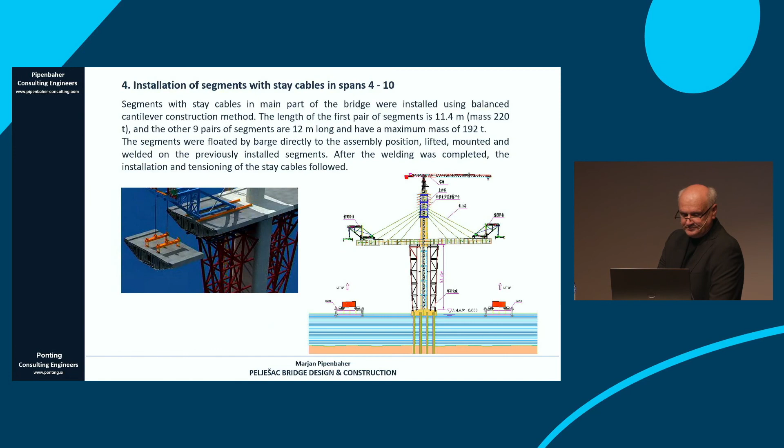We'll go further, we don't have time. We'll go also further.

Installation of stay cables, quite demanding. One important issue: we stress the stay cables only one time. That's very good. It's very difficult. Otherwise it should be stressed once again so that you get the final alignment.

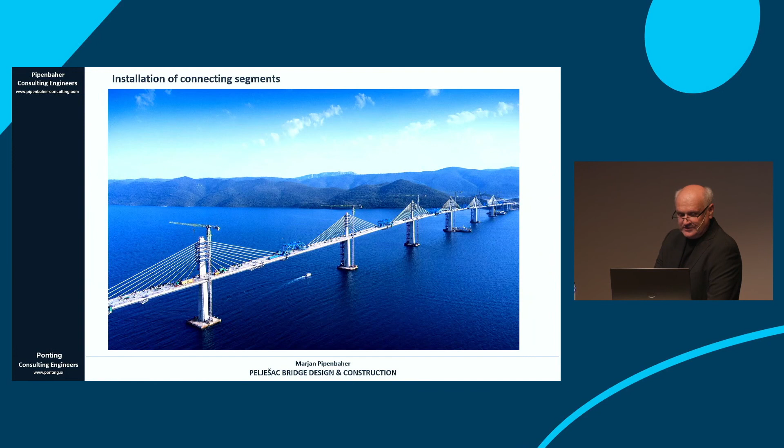And what is also very difficult and very demanding is the installation of the connection segment. This installation takes 30 hours, so we have to wait up to near the middle of the night. And also this analysis with camber control is very important.

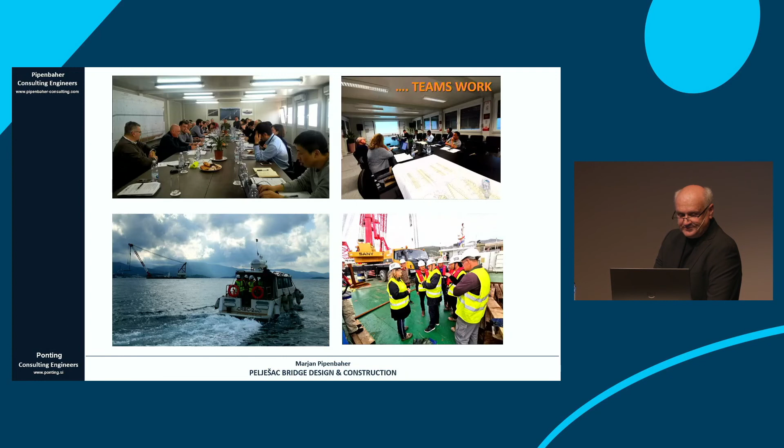But at the end, it is always teamwork, teamwork between the Chinese and the engineers. This is our team. Also a team with colleagues from the university, Zhang Dong. When he came and started to construct the bridge, he was 34 years old, very young. So we had to take care a lot about this.